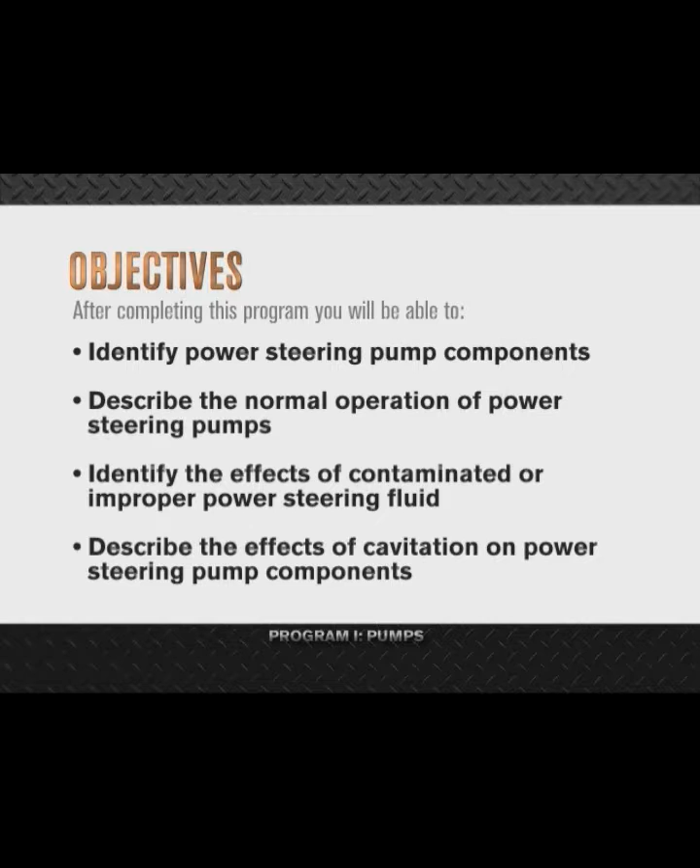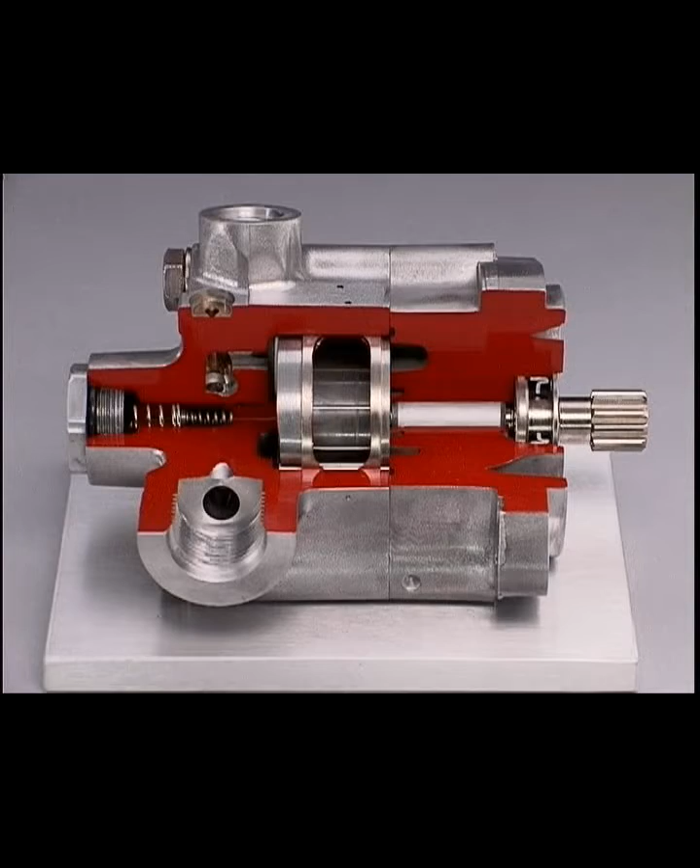Although they're manufactured by various suppliers, all International power steering pumps are vane-type pumps, either belt or gear-driven. The pumps on most current production vehicles are gear-driven. The main components of a pump are the pump drive shaft, rotor, cam ring, vanes, valve spring and spool, the pilot poppet, and the pressure and delivery ports.

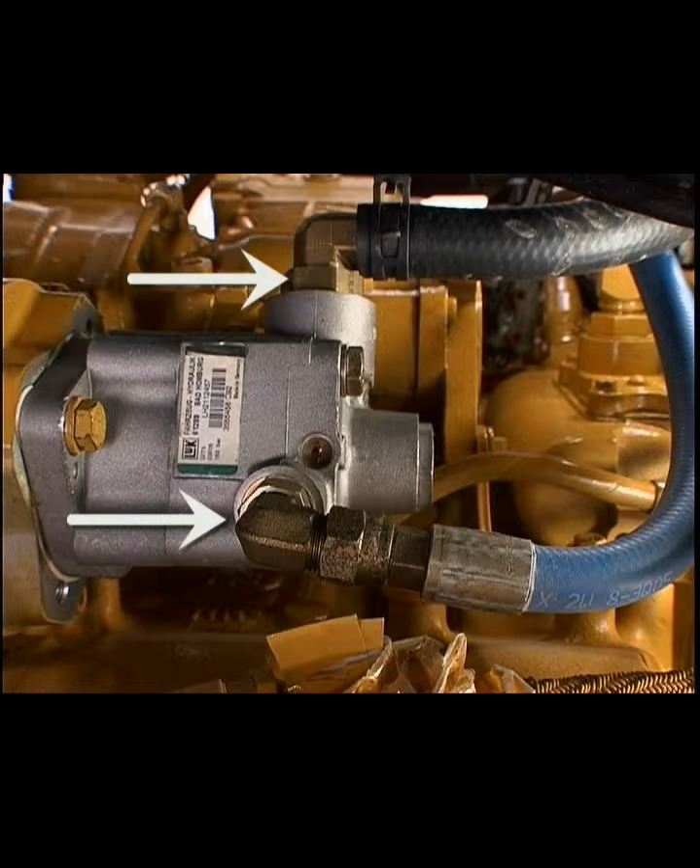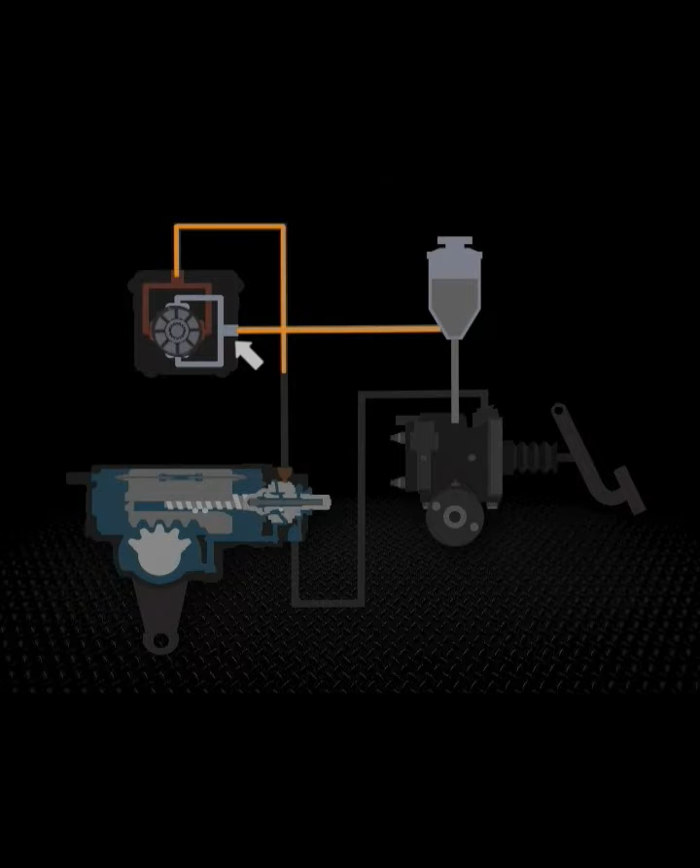The pump creates a partial vacuum at the inlet, which causes atmospheric pressure to force power steering fluid into the pump from the reservoir. The pump then pushes this fluid into the system to power the steering gear. The pressure and flow rating of the pump depends on vehicle application. Let's take a closer look at how it works.

The pump's rotor is driven within the cam ring by the drive shaft, which is connected to the engine. As the rotor turns, the vanes spin along the oval inner surface of the cam ring with a varying amount of offset from the rotor's center. The spinning causes the chamber between the vanes to expand as the vanes pass the inlet section of the ring. This creates a low pressure condition, which forces hydraulic fluid into the chambers.

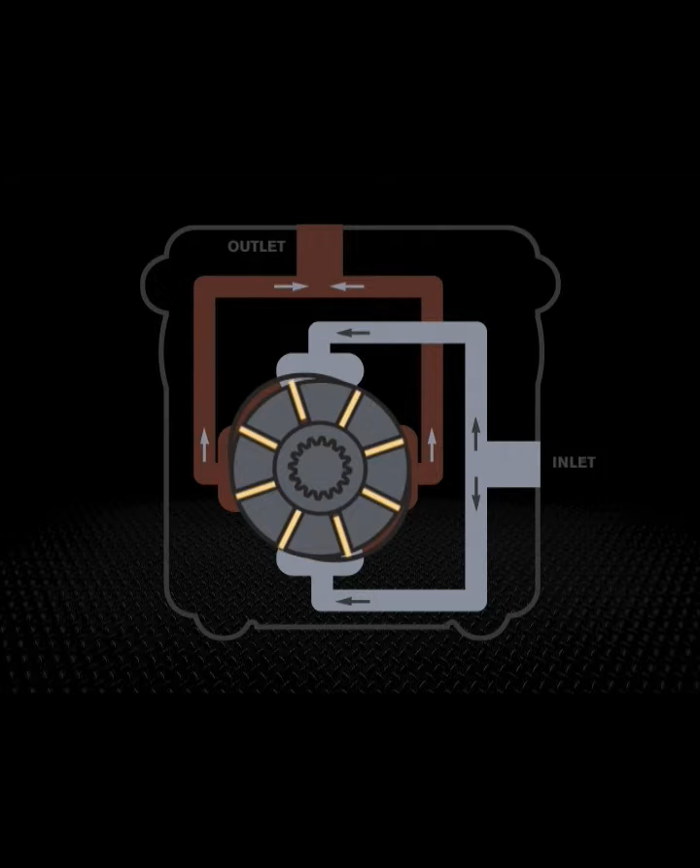This fluid is trapped between the vanes and carried past the large diameter of the ring. As the fluid approaches the outlet section, the ring diameter decreases, forcing the fluid out into the system. Within the vane slots of the rotor, system pressure is routed to the backside of each vane. This action forces the vanes outward, keeping them sealed against the cam ring during normal pump operation.

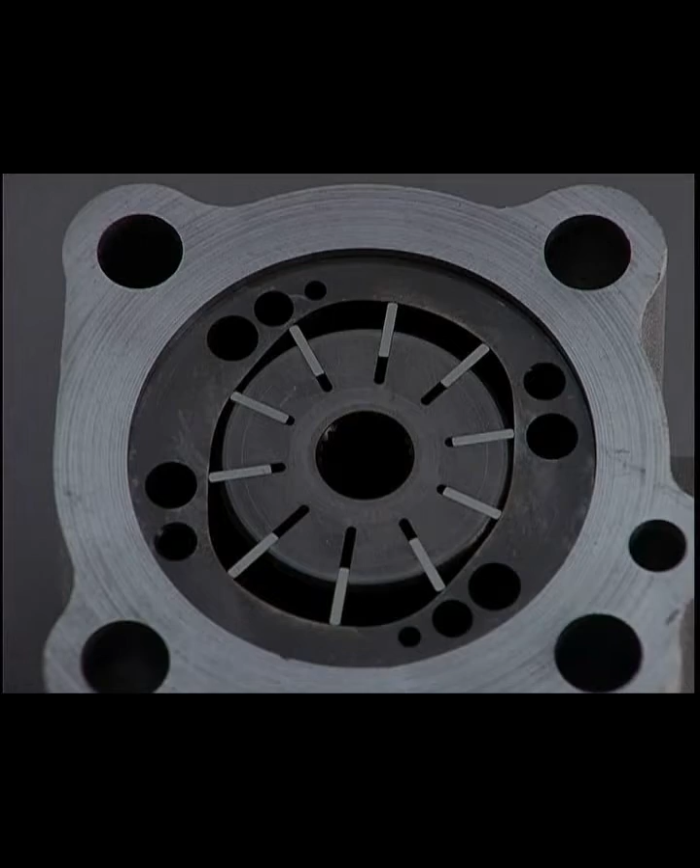The pump cam ring is shaped so that the two pumping chambers are formed exactly opposed to each other. Hydraulic forces cancel each other out and don't impose side loading on the shaft. The pump has a pilot-operated integral flow control and relief valve on the cover. An opening in the valve determines maximum pump delivery and system pressure.

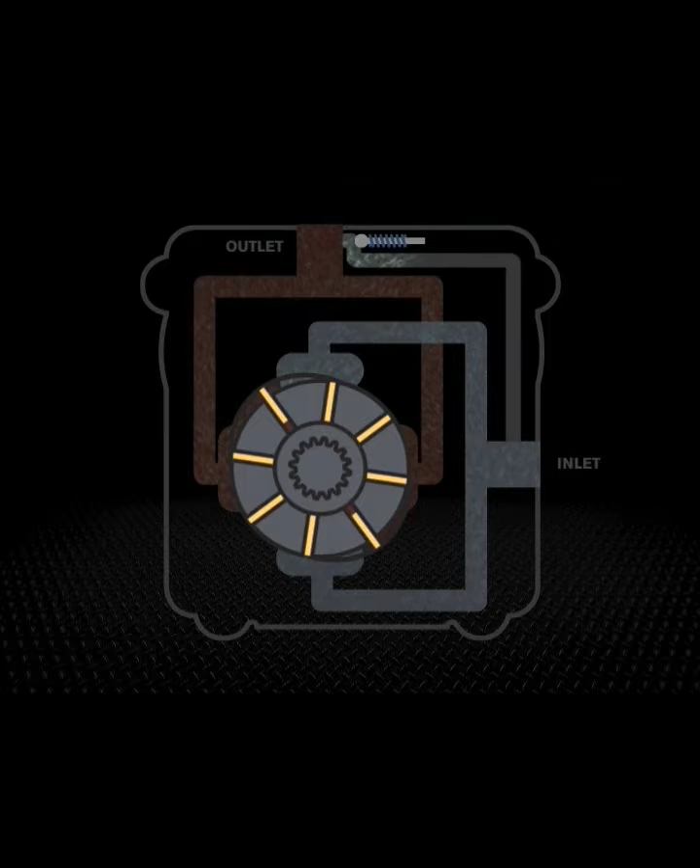When the relief valve opens, the fluid is bypassed to the reservoir on a 3-line pump design, or recirculated to the pump inlet on a 2-line design. This limits the system to a prescribed maximum pressure. During low speed, the total pump delivery can be passed through the opening. Pressure in this chamber equalizes pressure at the other end of the relief valve spool.

The light spring holds the spool closed, and fluid from the pump is blocked from the tank port by the spool land. When pump delivery is more than the opening allows, a pressure buildup forces the spool open against the light spring. Extra fluid is forced past the spool to the inlet port.

If pressure in the system builds up to the relief valve setting, the pilot poppet is forced off its seat. Fluid in the large spring chamber flows through the spool and out to the tank. This causes a pressure differential on the spool, shifting it against the light spring. All the fluid can then flow to the tank.

Vane pumps are built to close tolerances. Any contamination will cause damage that can lead to pump failure. For example, particles of dirt or sand in the fluid are abrasive and will score or wear the pump's closely fitted parts. Fluid contaminated with water or other liquids can rust the pump parts and housing. Rust will not only build up on the metal, but will also flake off into the fluid. All of these contaminants cause extra wear on parts, increasing the chances of internal leakage and reducing the pump's efficiency.

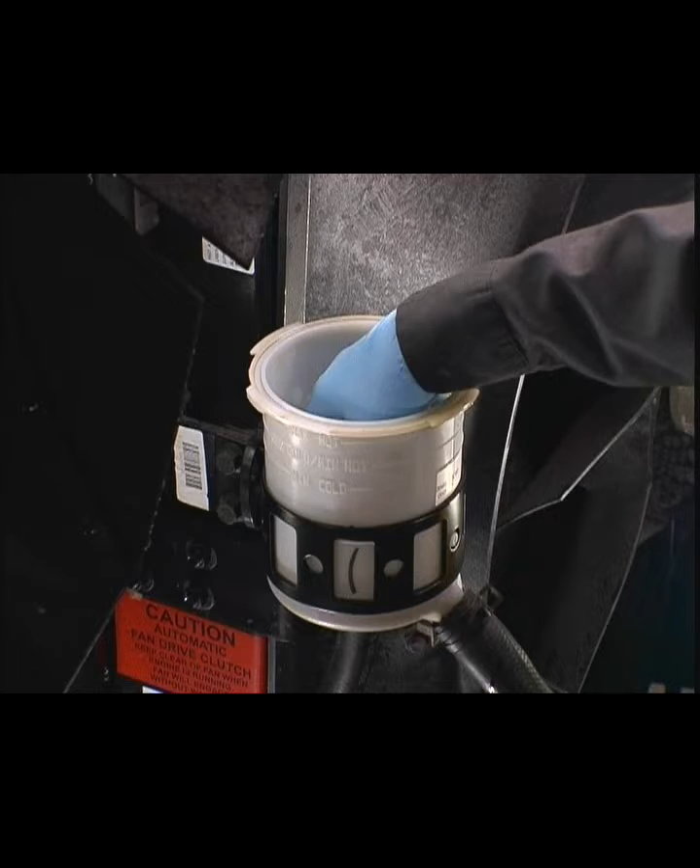Sludge is created when fluid reacts with excessive temperature changes or condensation. It can build up on the internal parts and eventually plug the pump. The heat and friction could cause the pump parts to seize. Air, water, and heat can also create sludge through oxidation. To ensure a contaminant-free environment, the fluid and filter should be changed according to the lubrication tables in the operator's manual. Always use the recommended fluid for the vehicle you are working on.

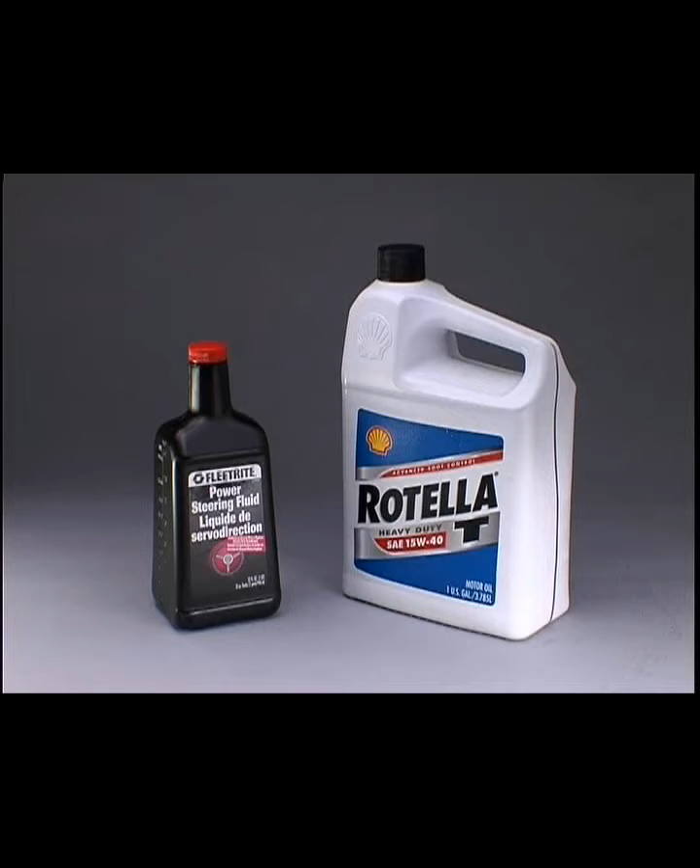Thin or worn-out fluid can be the result of extended drain intervals. Using the wrong type of fluid can cause many of the same conditions as thin fluid, including increased pump wear due to inadequate lubrication, leading to a loss of power assist, and reduced system pressure, also leading to a loss of power assist.

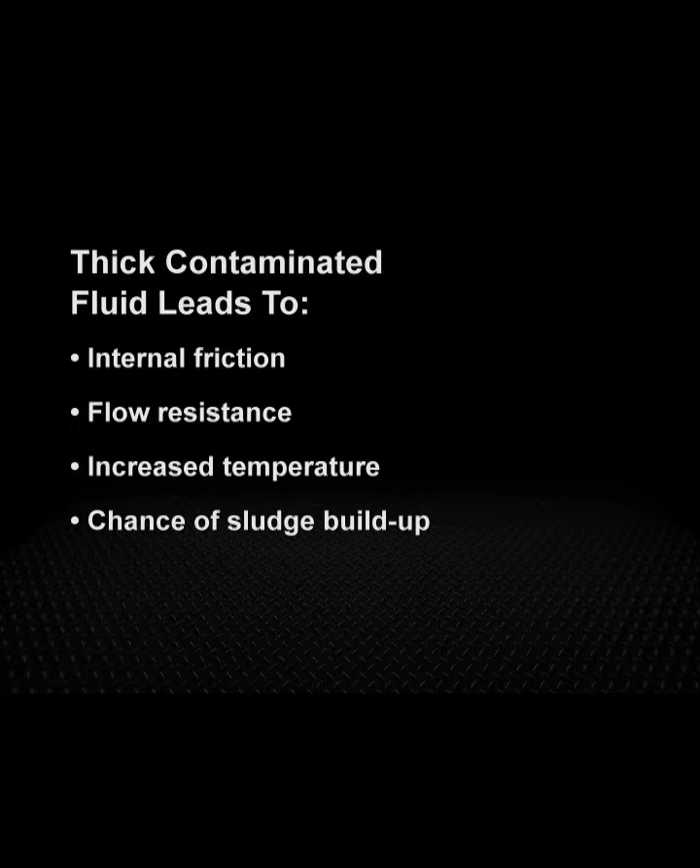Improper maintenance techniques, such as failure to change the fluid and filter at the prescribed intervals, can cause the fluid to become too thick, potentially leading to increased internal friction, which in turn will increase flow resistance through the system; increased temperature, which increases the chance of sludge buildup; and finally, more power will be required for operation.

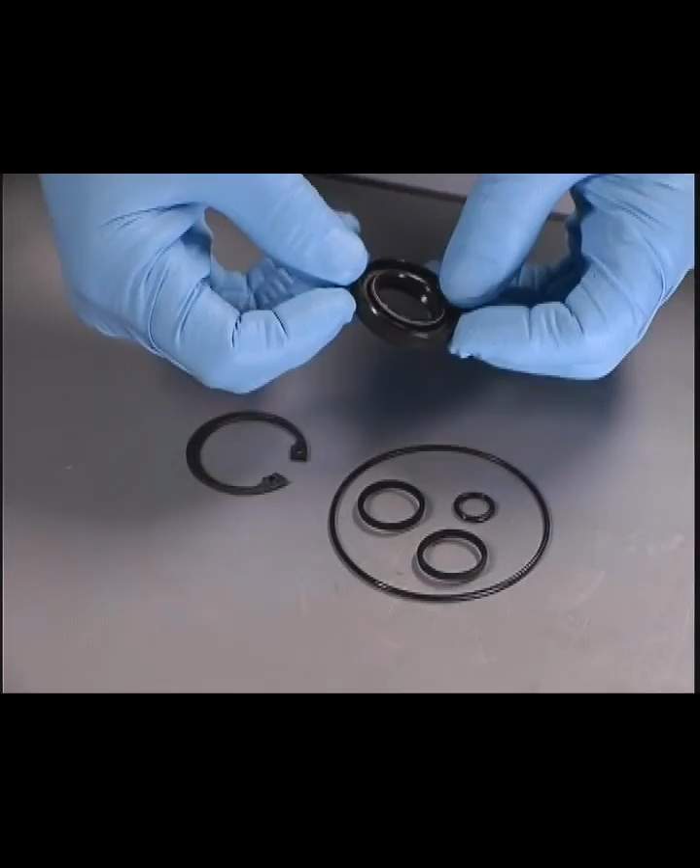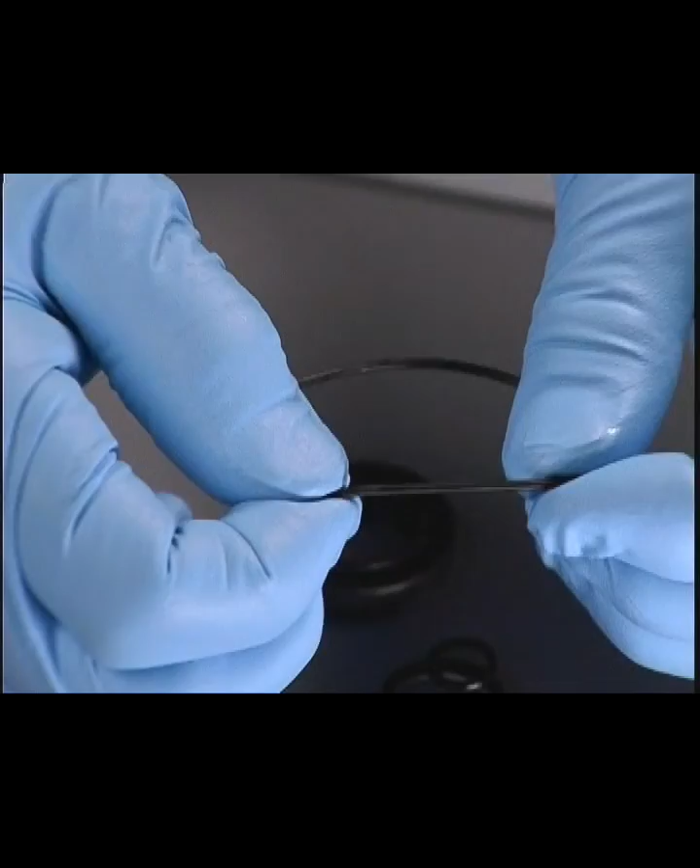The chemicals that make up some fluids can react unfavorably with the fibers or synthetic materials used in the pump packing and seals. This can lead to rapid deterioration, swelling, or shrinking of the seals and packings, resulting in both internal and external leakage. It is important that you refer to the operator's manual or ISIS for proper fluid type.

Poor maintenance and contaminated fluid can also lead to poor pump operation, resulting in pump cavitation. Cavitation occurs when the fluid does not entirely fill the pump as designed. The more common causes of cavitation are improper bleeding, air leakage on the suction side, or low fluid. A pump that is allowed to continually cavitate will develop seriously worn parts, sluggish or erratic operation, and loss of power steering assist. Eventually, the pump parts may seize.

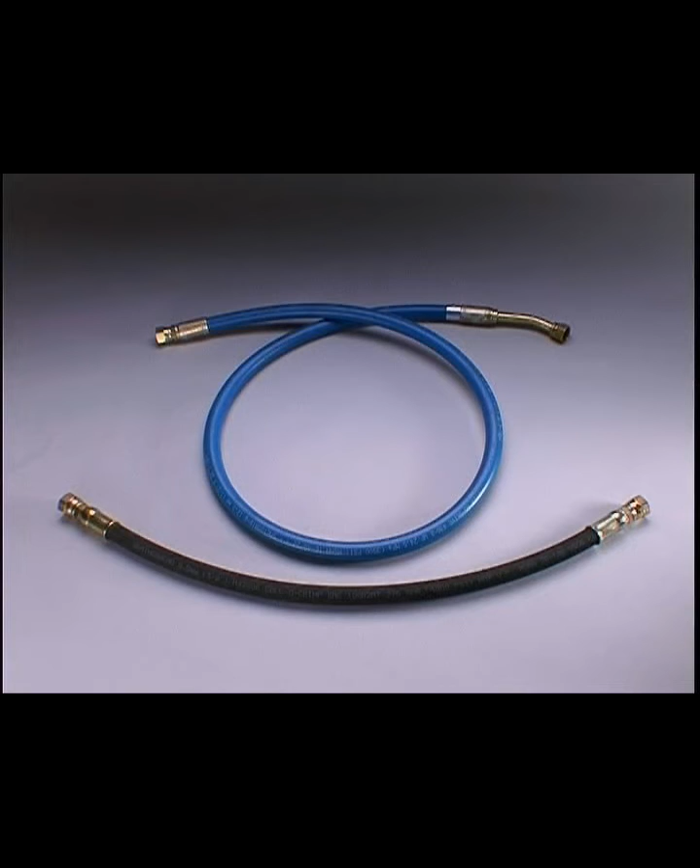Another cause of cavitation is substituting a hose that is smaller in diameter than the original, which leads to excessive back pressure or pressure loss. This in turn allows air bubbles to form and create excessive heat, eventually causing the pump and seals to fail.

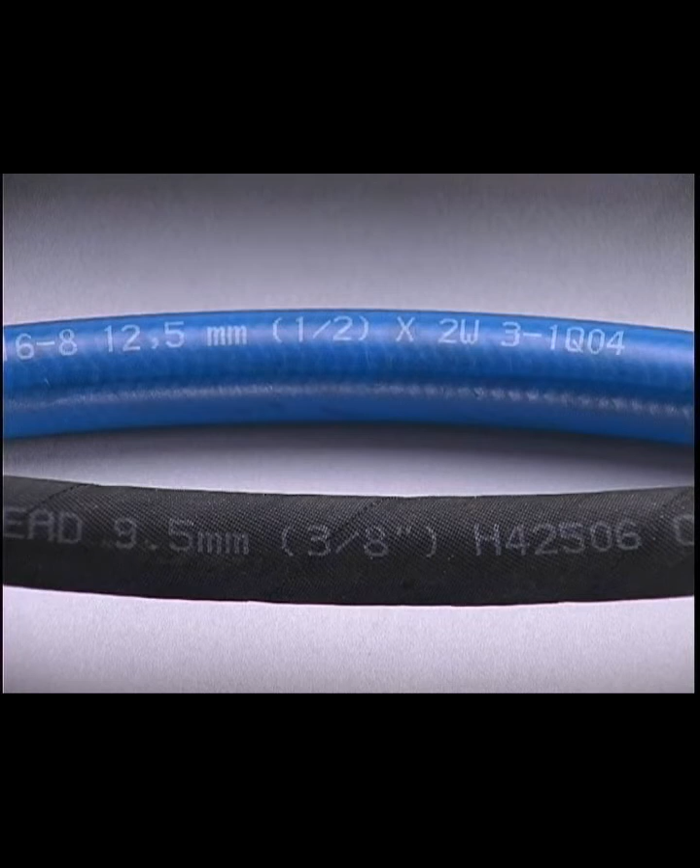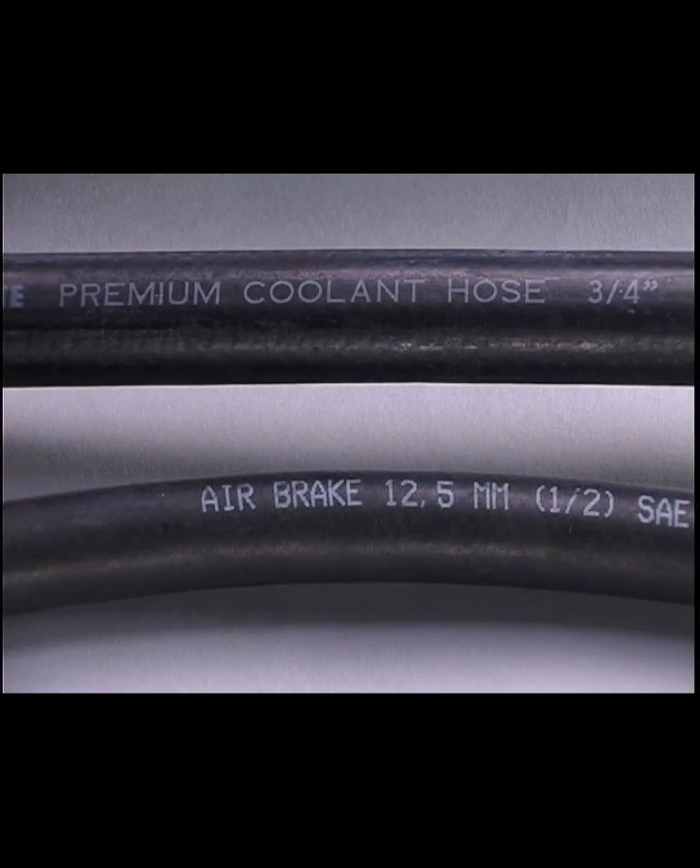Using a hose made of material that doesn't meet system standards could also cause problems. For example, an inadequate hose might burst or collapse, depending on whether it was installed on the pressure or suction side of the pump. Consequently, International recommends the use of only OEM-approved hoses and fittings.